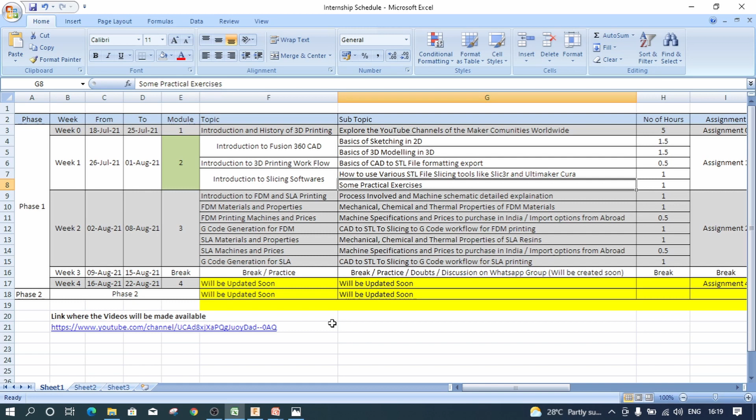As part of this internship, we will also be learning something about value engineering. This was a seminar presentation I gave at Andhra University, and in this PPT I have explained how you can apply value engineering to improve practical products, how you can improve the existing design, and how you can reduce the cost. I have taken the example of a toy car. As we go along, I will be discussing in detail what exactly value engineering is and all that.

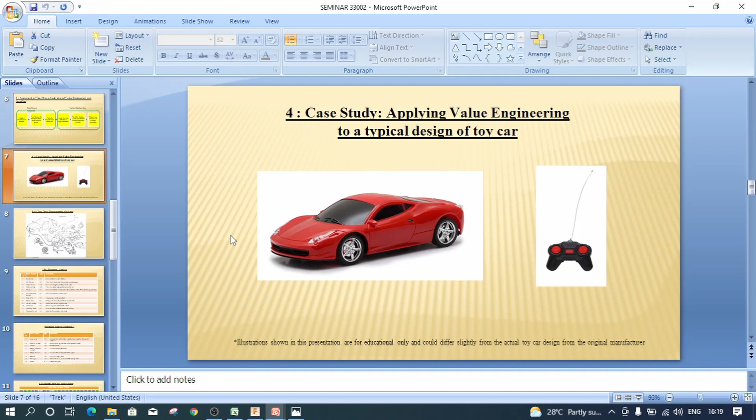But for now, let's focus on the designing part. As you have seen this picture on LinkedIn, we will try to design this particular toy car part by part, and we will try to 3D print each part, and we will also try to see how we can assemble each and every part and make this toy car practically available in the market.

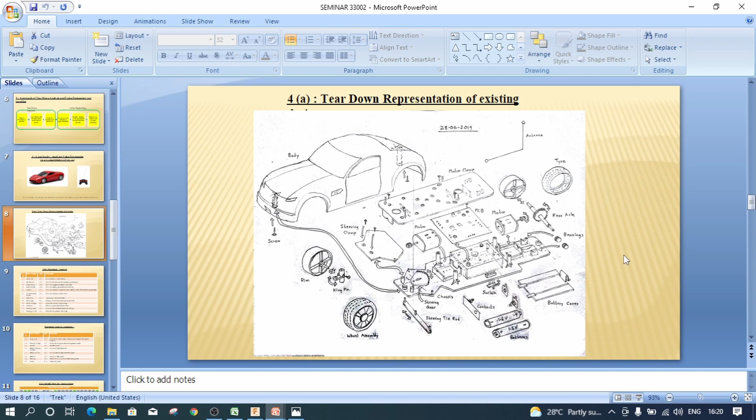We will be seeing it from the design stage itself, and we will see how we can practically develop a complicated product like this one. As part of this first video, we will see how we can design this particular battery cover, which you are seeing in the bottom right corner.

Don't worry if this design looks very complicated. We will be seeing it one by one, and a few of the parts will be assigned to you as your design exercise, and a few of the parts will be assigned to you as assignment.

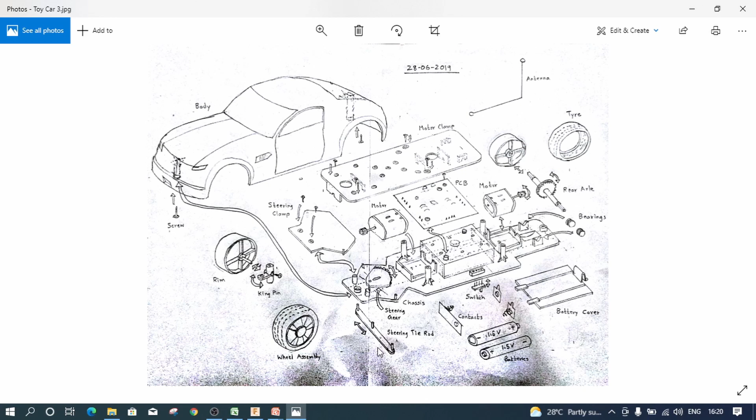Before we dive in, let me quickly go through what Fusion 360 is and how you can start designing with it. After you sign into Fusion 360, this is how the model workspace is going to look. In the top right hand corner, you can see your name, and once you click on that, you can see Autodesk account, preferences, my profile, share feedback, and sign out.

I want you to click on preferences. After you click on preferences, a window like this will open. Go to the top left hand corner and click on general. Under general, you scroll down and you will see something known as pan, zoom, and orbit shortcuts.

Here I want you to stick with Fusion 360 settings because you will be more familiar with Fusion 360, but you can try it out if you are already a SolidWorks user or an Autodesk Inventor user, you can use those settings. For now, we will assume we will use Fusion 360 settings.

I want you to pay a little more attention to default modeling orientation. In some CAD softwares, the vertical direction is the y-axis, but it will be a little confusing if you start designing with y-axis as the vertical orientation. So I want you to keep this with z upwards. After this, another thing you need to pay attention to is your default units.

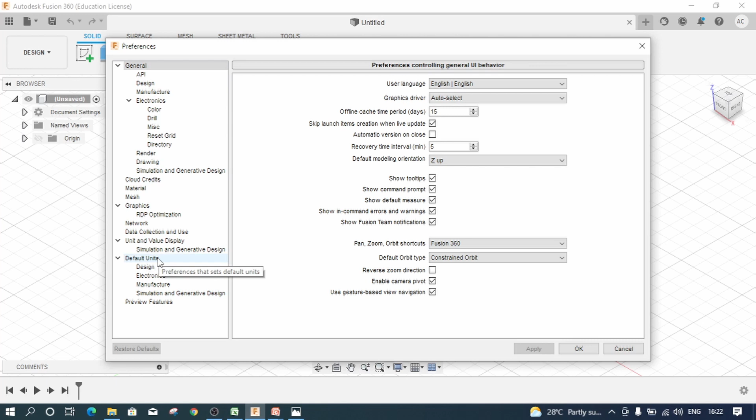In the left hand menu wizard, if you look down, you can see something known as default units. Click on default units, and inside you will have design. Click on that design, and it will ask you what default units you will be using. We will be using millimeters all through the course, but based on your project requirements, you can use centimeters, meters, inches or feet. I will stick with millimeters for now, and lastly click on OK.

So now we have seen the basic preferences you should set up before starting to use Fusion 360. Secondly, there is something known as Project Manager. For that, go to the top left hand corner of your screen and you will see the Show Data Panel icon. Click on these small little boxes and a menu bar opens up like this one. This is going to be your Project Manager, like your file manager, where each design will be saved in a project folder.

As Fusion 360 is a cloud-based software, whatever designs you do will also be saved in the cloud. Later, we will also discuss how you can share your designs with the cloud, and with your friends and all that.

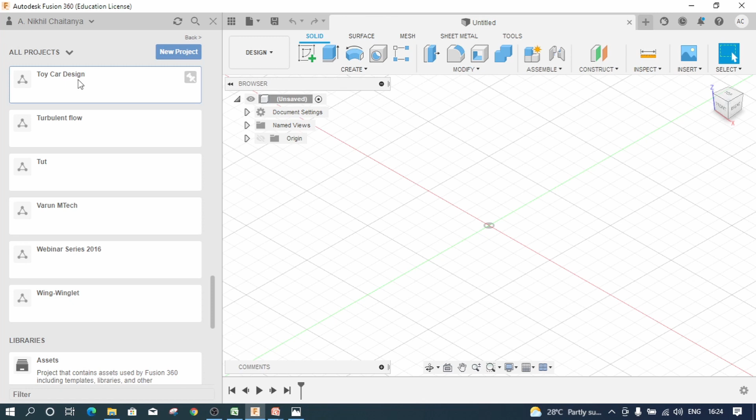But for now, let's click on this new project. Inside the new project, I will say toy car design. So this is going to be my root project. I will click on hit enter. And after giving it a little time, you can see that a project known as toy car design has been created. I want you to double click on the folder which you have just created.

And you can see something like this. On the top of this menu, you will have a data tab and a people tab. The people tab is something you will use to collaborate with other designers, but for now we will only focus on the data tab. On this data tab, you can see upload or a new folder.

So whatever designs you do currently in the workspace will be saved into this particular toy car design folder, which you can see on this note: saved and uploaded files will appear here. As we develop more and more models, all those design files will be saved into this folder. Similar to any file manager, you can create copies, move your design files into various folders, and also share your designs with others using this people tab.

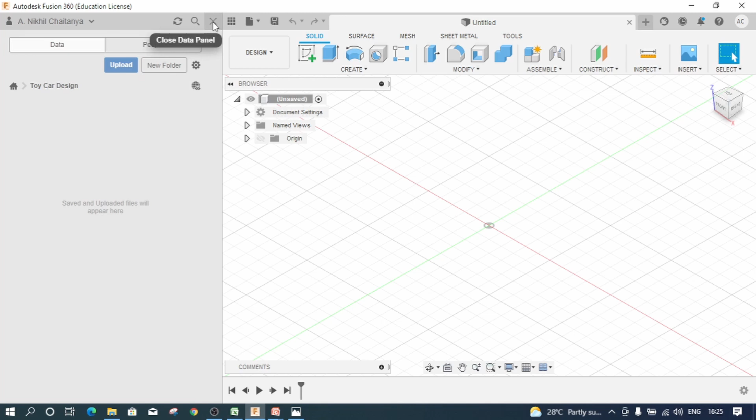For now, I will close this data panel and let's dive into what you can do with this design workspace. We are currently in the design workspace. If you hover your mouse onto this design workspace, you can see change workspace comes up. If you click on that, you can see design, generative design, render, animation, simulation, manufacture and drawing. These are the various workflows available inside Fusion 360. We will mostly use the design workspace itself, but based on your requirements, you can also explore these by watching various available resources online.

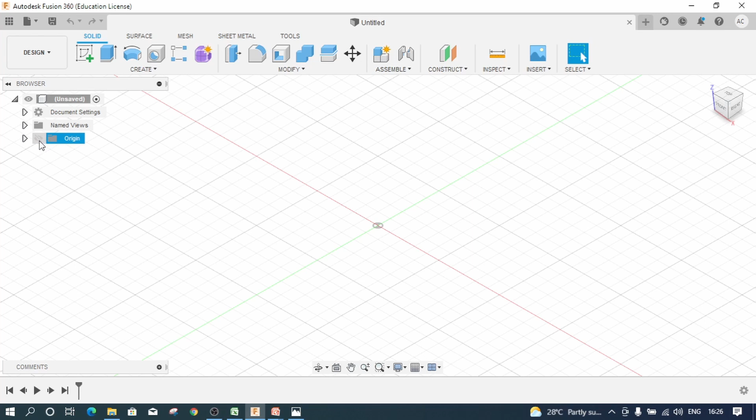Before we start designing, let me tell you that you need something known as origin. Origin is the XYZ coordinate from which the whole design part is going to be associated with. If you go to this origin folder, there is a small icon which is hidden. Click on that and you can see the three default planes: XY, YZ and XZ. These are the three default planes which you should start working with, and as we go along, we will see how you can create your own planes.

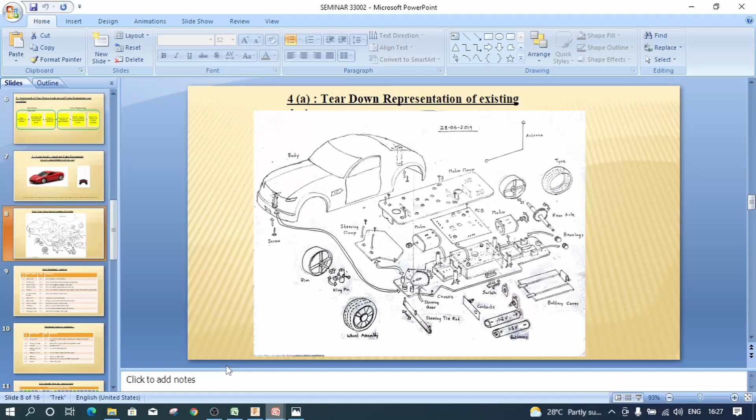So now let me walk you through the basic workflow. The Fusion 360 design workflow is done in 4 steps. I want you to get these 4 steps by any means. The first step is to select a plane or a face in the 3D workspace and click sketch. After we click on select plane and click sketch, we will be entering from 3D into 2D. After that, we will start sketching the closed profile. We will later see what is meant by a closed profile and an open profile.

This is similar to Microsoft Paint or AutoCAD which you might have used in your college days. After we are done with the sketch, we should exit the sketch, and the workspace will enter from 2D back into 3D. That's exactly where your actual model development happens.

We will be performing various model operations on the sketch you've drawn in 2D, to add material, remove material, or modify the material. Whatever object you are trying to design in Fusion 360 happens in these 4 steps. The workflow is pretty much the same whether you're using CATIA, SolidWorks, or any other software, but this is the workflow you need to remember as a CAD designer.

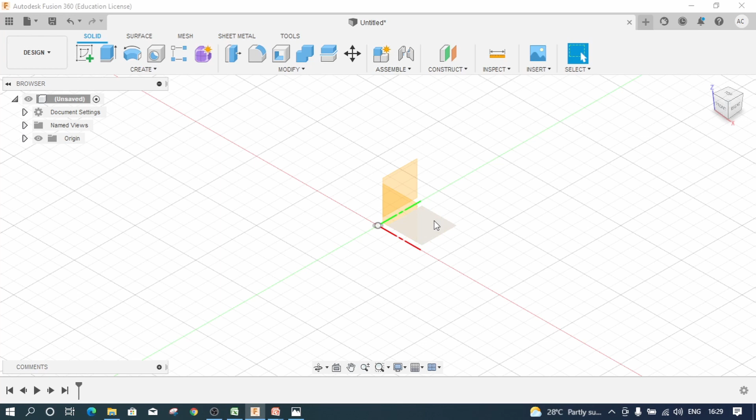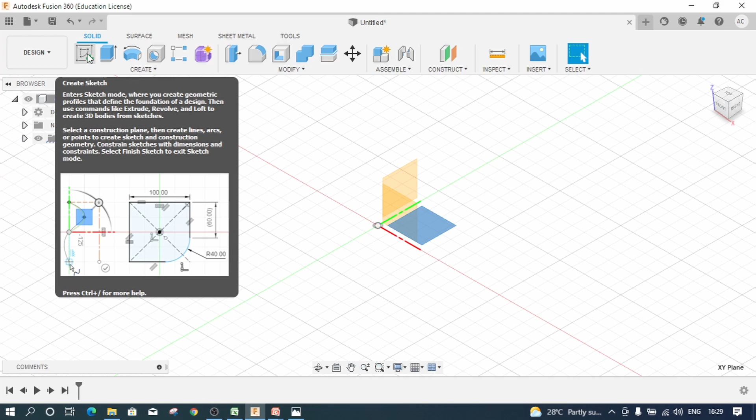If you hover over your mouse onto this XY plane, the plane gets grayed out, meaning it is going to get selected. I click on that particular plane and it gets highlighted in blue color. Once highlighted, I go to the main menu bar and select Create Sketch. This is the option you will use most of the time, and the primary part you'll use to develop anything. I click on that and very soon the workspace enters from 3D into 2D.

This is pretty much similar to AutoCAD. You can see in the model options like line, rectangle, circle, spline, mirror - all various commands you will be using. In AutoCAD we have various commands you type into the workspace, but in Fusion 360 you don't have any commands - you only use the toolbar. So this is your toolbar.

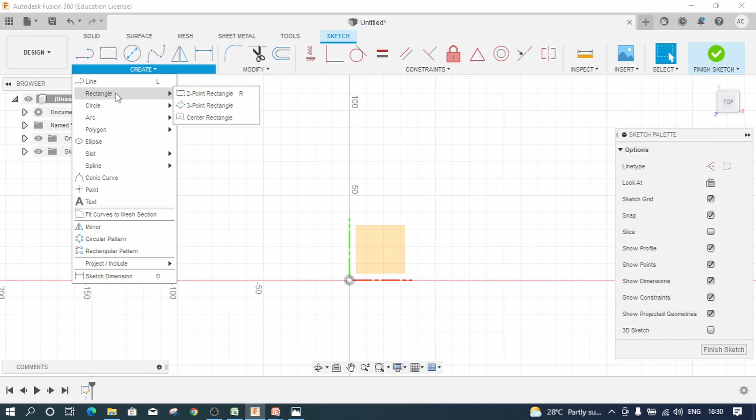Let's try out and see what you can do with this. You can use this inverted triangle here to see more details of what options are available in this menu. First we'll see rectangle, and again in rectangle you have 3 sub-options: 2-point rectangle, 3-point rectangle, and center rectangle. I recommend using center rectangle in most cases, but based on requirement you can also use 2-point and 3-point rectangles.

For now I will click on this particular center rectangle. After you click on center rectangle, it says place center point. Also you can see my mouse showing crossbars - a vertical crossbar and horizontal crossbar. That indicates you are inside the sketch and a certain command is active.

I will slowly go back, and as you can see, if I click on this particular origin, my cursor turns into a blue color rectangle. That blue color rectangle is nothing but your snap point option. Snap is a way in which you can precisely select the particular point you want to select - this is pretty much similar to AutoCAD. If you are very familiar with AutoCAD, you can easily learn Fusion 360 in very little time.

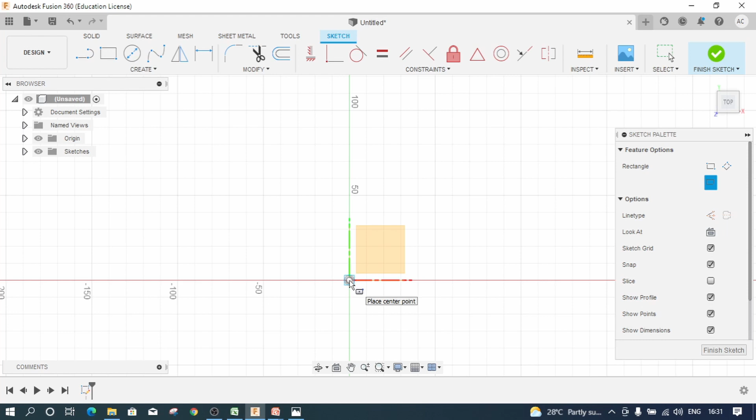For now I will click on this particular origin, and after I click on the origin, if I move my mouse, you can see the rectangle is created in a dynamic way. It is asking me to specify the size of the rectangle. There is a more advanced way in which you can give dimensions inside Fusion 360.

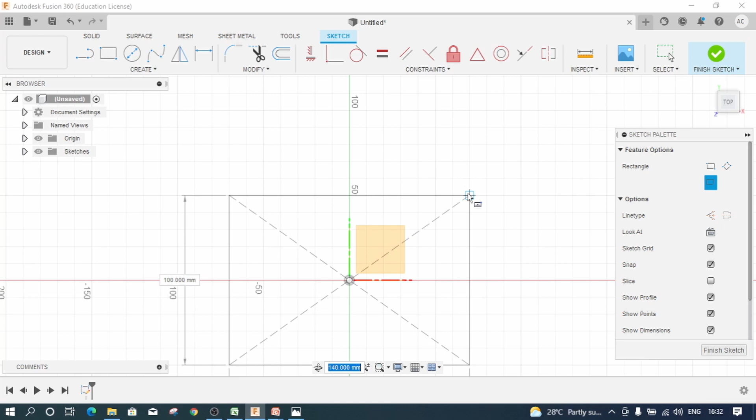We will see these in more detail now. What you can do is either click a particular point to decide your rectangle size, or give individual dimensions, or use dimension lines and edit them later. We will see these one by one. I will click on this particular point, and very soon my rectangle got created. Now if you click the middle mouse scroll button, you will be able to move and pan in this design.

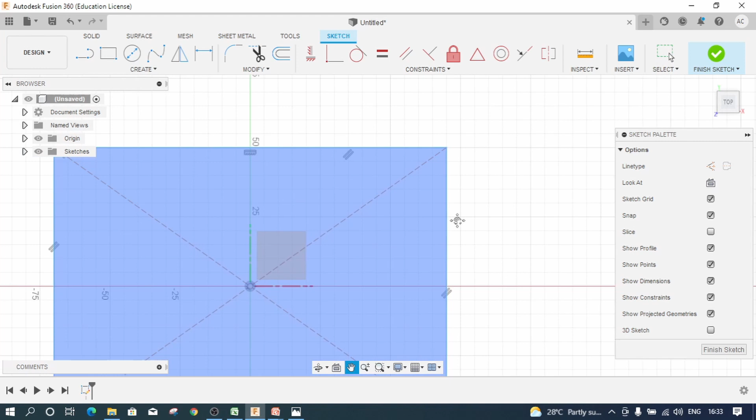After it is done, click escape on your keyboard. This will bring you out of that command, and now you can easily move your design. So now I have given some random rectangle and I want to give dimensions to this rectangle.

So how do I do that? Go to the top menu bar and select sketch dimension. Click on that option, and your cursor changes. Click on this particular line, and you can see if you bring your mouse over it, it highlights that line. If you click on this line, it shows up a dimension like this.

It shows 140.00, which means 140 mm. It doesn't matter wherever you click, it only creates a dimension line, but it doesn't affect the actual dimension. So let me click somewhere, and it asks for the dimension. For now, I want this dimension to be 100 mm, so I'll type 100 on my keyboard and hit enter. As you enter 100 and press enter, you can see the model adjusts itself, and now the rectangle is 100 mm in length.

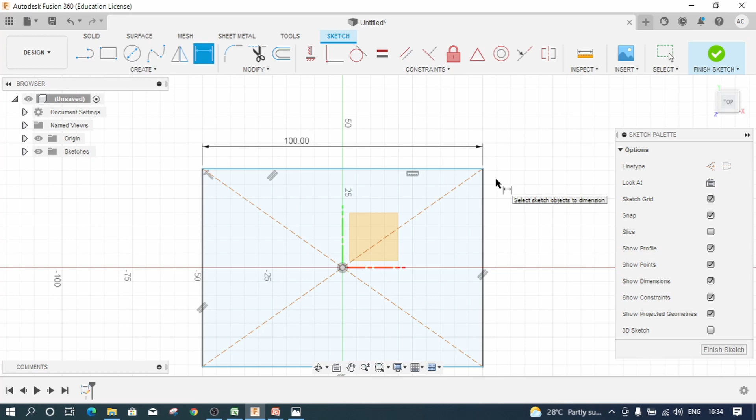The cursor is still active, which means you're still in the command. So now if I click on this vertical line, it will give me the dimension of the vertical side. I'll click here wherever I want, and it says 71.428571 mm - that's the precision of Autodesk Fusion 360. So now I'll say 50 and hit enter. After hitting 50 and enter, you can see the rectangle size is automatically updated. Now I'll hit escape.

Let's say you've made a mistake in giving your dimensions. What should you do? It's very easy - go ahead and click on the dimension line and double click it. If you double click it, it opens for editing. Now I'll say 150, and if I say 150, automatically the length gets updated to 150.

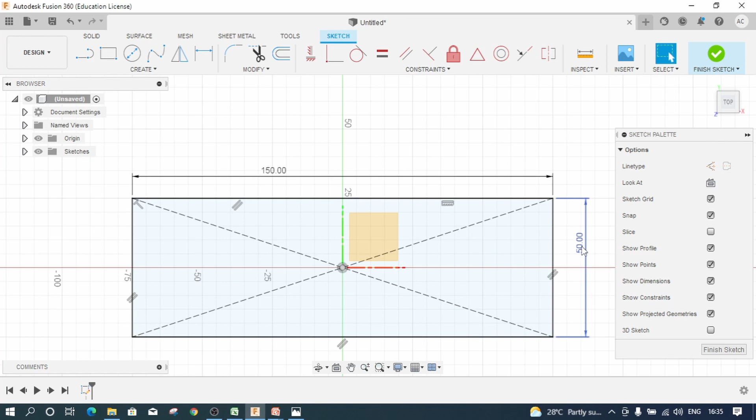Similarly, I'll go ahead and double click on this 50, and it opens up, and I'll say 80. After I hit 80 and enter, the height of the rectangle becomes updated to 80 mm.

Now that I'm happy with the sketch, I want to come out of this sketch. See in the workflow I gave: select the plane face in 3D and click on sketch - we've done this part. Start sketching in 2D on the selected plane - so we've created our sketch and drawn a rectangle. Step 2 is also done.

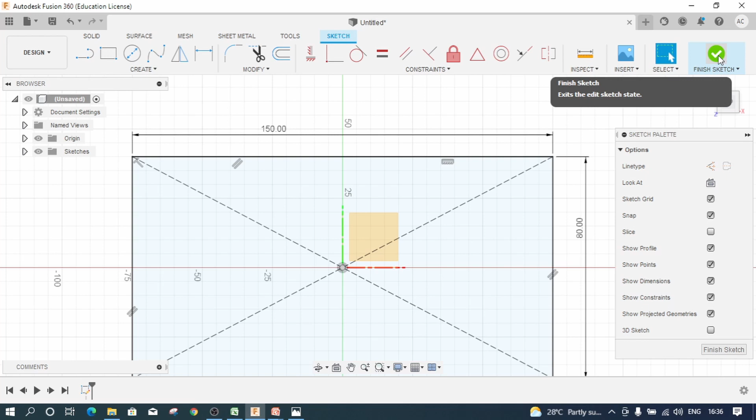Step 3 is to exit the sketch, come out of 2D, and enter the 3D workspace. For that, there's an option called Finish Sketch on the top right hand corner with a green circle and a white tick mark. Please click on that. Once you click it, you've come out of your 2D workspace and entered your 3D workspace.

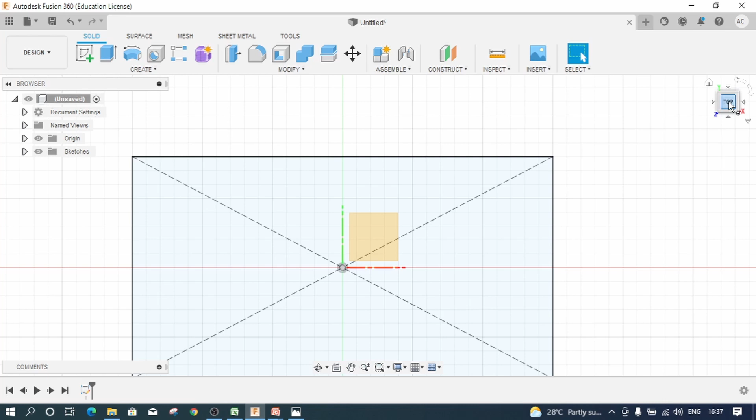But still I'm only able to see 2D. For that, go to this cube and there's an option known as the inverted triangle. Click on that - now you can see go home, orthographic, perspective, and all. Click on orthographic, and on this cube you can see 'top', meaning you're in the top view. If you want to change, click on this cube, and wherever you click, you'll enter that particular view. Based on these arrows, you can also navigate and rotate your models. If you want to enter the home view, click on this home icon. If you click on home, the model will automatically enter its home view - this is the home view.

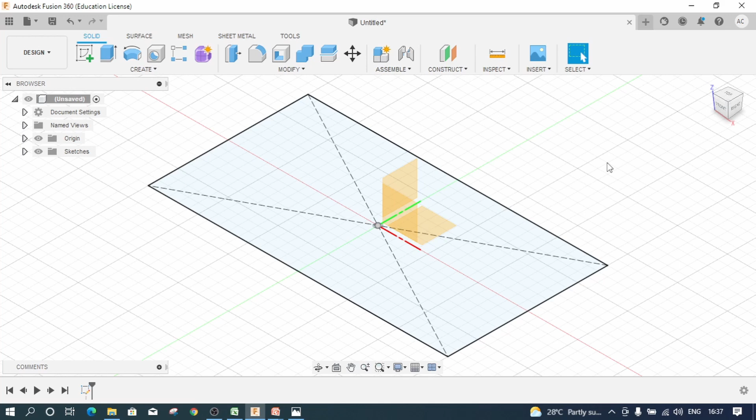In the next video, we will see how you can perform model operations on the sketch in the 3D workspace. So that's all for this video.